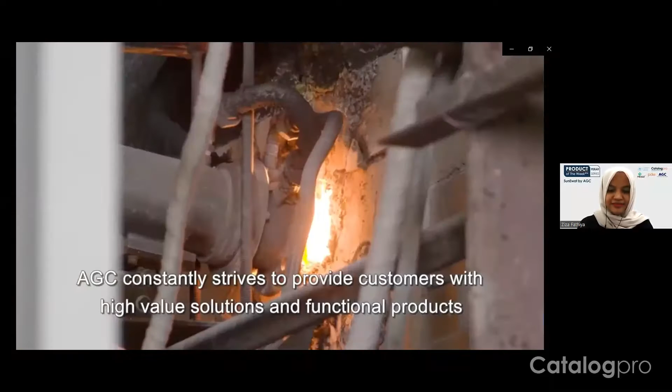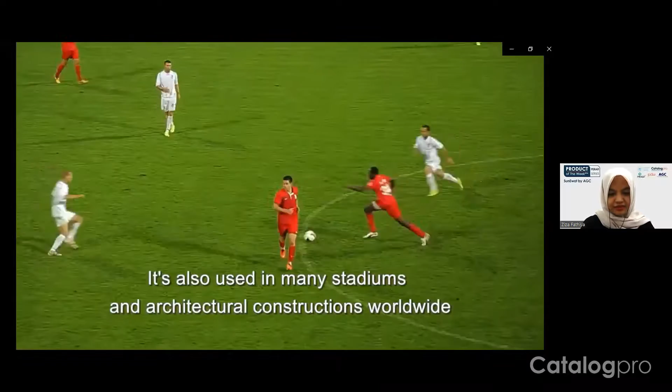AGC constantly strives to provide customers with high-value solutions and functional products. We offer a wide range of materials such as glass, chemicals, electronics, and ceramics, and have a strong presence in many countries around the world. AGC's aim is to provide valued solutions and high-quality materials to people around the world. Our fluoropolymer resins for coatings is used in many places around the world. Our fluorine film is used in Allianz Arena in Munich, Germany, and also in many stadiums and architectural constructions worldwide. AGC's display glass is used in smartphones around the world. Our glass plays an essential role in presenting clear images. At any point in time, AGC is playing a part in supporting society somewhere in the world with the provision of unique materials and solutions.

Mungkin teman-teman juga sudah melihat video AGC tadi, dan kita akan mendetailkan apa sih yang akan dibahas oleh AGC ini. Okay, let's start the talk show.

Marcus, can you introduce yourself and introduce AGC, and after that share what is SunEwat? Hello everyone, I'm Marcus, doing sales and marketing for AGC Smart Glass product. Today I'm going to share this product, smart glass solutions for sustainability buildings. First I will introduce what AGC is and how AGC is represented in Indonesia, and then we will talk more into the products itself.

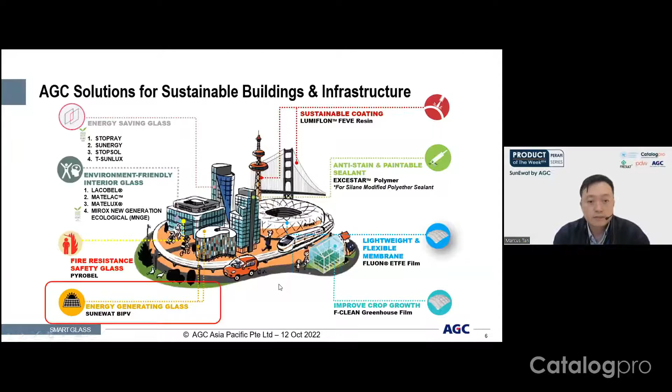So what happens is that in renewable energy in Southeast Asia, we hear about solar energy potential in Indonesia, with plans for expanding renewable energy across the country, and government policy intends to see 23% of energy supplied by modern renewables like solar by 2025. In Malaysia, we are also looking at moving with the times, whereby KL is looking at getting more renewable energy for new projects, like 30%.

In Thailand as well, renewable energy is moving towards these power generators. In Vietnam, they are also targeting net zero by 2050. And even in Singapore, we are looking at having natural gas, solar, and regional power grids, and switching towards more clean energy or better energy efficiency.

So what happened is that we are also looking at on-site renewable energy capability, which includes a good reduction of the need to encroach land or even waterways for the installation of conventional solar panels. It will also be good to generate on-site renewable energy for better environmental sustainability, and it will increase reliability, stability, and enhance energy efficiency as well.

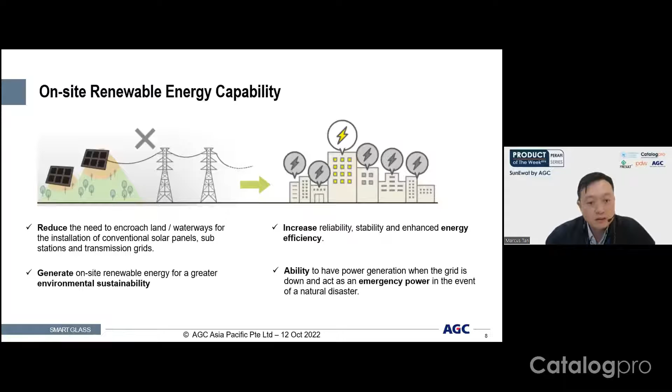Oh, sorry, I interrupt your presentation again. Okay, so this is quite interesting. So this is not just glass for the buildings, but the product can be used like solar panel or solar cells, right, Marcus?

Yes, yep, so it can be. It is actually a solar cell which is embedded into a piece of glass. Later in the presentation, you can see how the BIPV module actually works. Okay, please continue, because it's quite interesting for us.

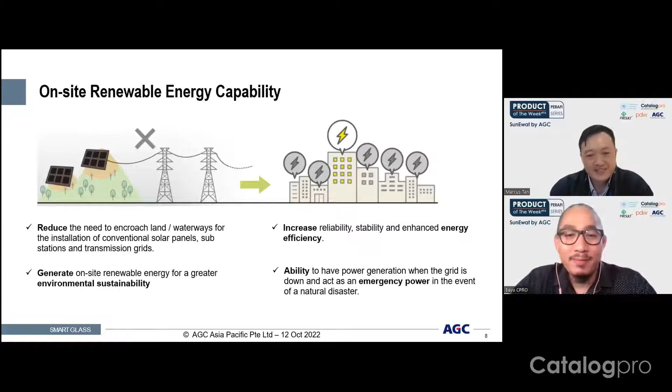Okay, so basically, like what you said, BIPV can be applied or used in on-site renewable applications, just like conventional solar panels. On this screen you can see that usually conventional solar panels are on the rooftop itself. But for BIPV, which is building integrated photovoltaic, you can actually use it on your facade, your skylight, canopies, your balustrade, and even your walkway as well. We have many project references later that we can showcase. So basically, it can perform as architectural glass and have a good variety of applications and solutions.

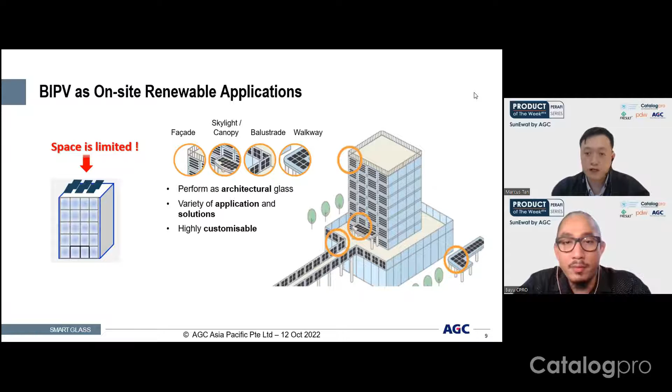And it is actually highly customizable. So in a sense that if you want any designs or patterns, we are able to provide you with our range of products. Later I will explain more in detail.

Sorry Marcus, can I ask about the previous slide? So in the normal solar panel we usually put it on the roof. In that case, you can use any glass surface to put the BIPV, right? Any surface, yes. So basically you can do it on the glass, and then you can do it on your facade, which is placing on the glass, or even your cladding as well. Oh, so all the facade can be the solar cell.

Yes, so even some of our products later, you can see that you will not be able to see the cells. Actually, it's our opaque kind of solutions. Okay, thank you, thank you. Well, it is quite an interesting product.

So in the conventional system, the solar panel and the glasses are separate systems, right, Marcus? Yep. And these products we can join to become one solution, become architectural products, and become an application for the solution for electricity, or we can catch the heat from the sun. Solar panels can do it today, right?

Yeah, so basically it is a glass, actually, but it is a glass with solar cells, and it can give you some shade, and it will also be able to provide energy generation using or harvesting the solar energy from the sun. So I would say not only 2-in-1, but kind of an all-in-one application.

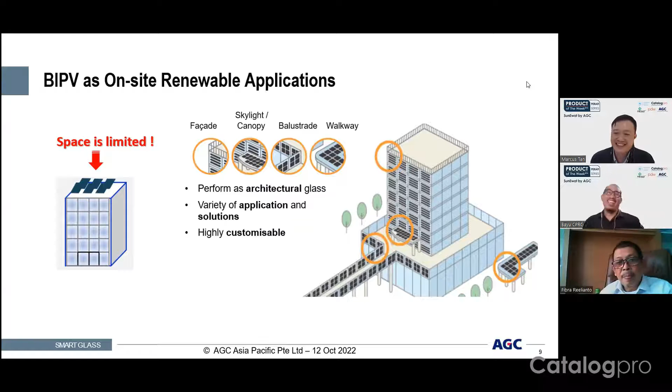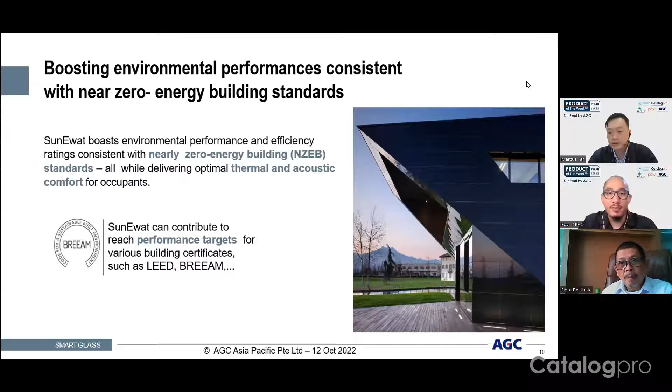Okay, so yep, they basically can boost these environmental properties, like what we have seen or shared just now on these near zero-energy kind of standards, in the sense of LEED and BREEAM as well.

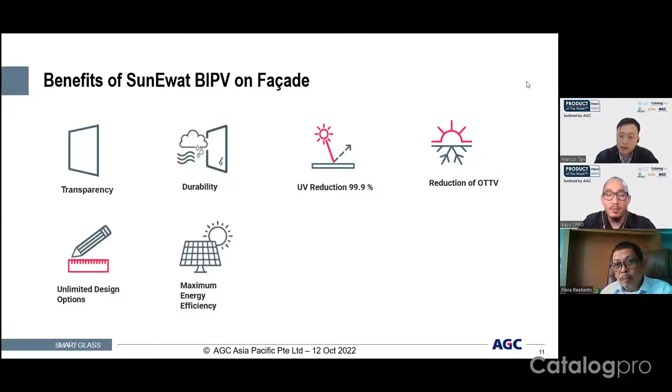Later I will share with you all our product range, and you will understand what we have for each kind of usage. And of course, it maximizes energy efficiency by letting the sun come in. With this IGU or even laminated glass, it can provide good thermal and acoustic insulation. And of course, the product is warranted by AGC, which gives you assurance and guarantee of good quality products.

For the durability, is it the same as normal glass or improved with this solar cell? It will depend on your modules or cells, but actually it is the same or even better for durability compared with normal glass.

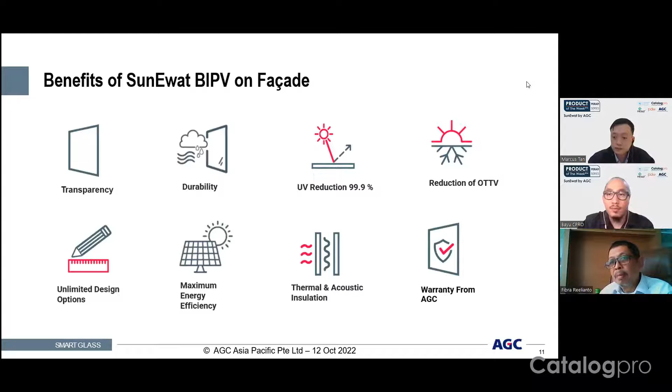So let's explain. If you look at this page, you can see that the glass composition is actually two pieces of glass laminated, interlayered using EVA, and in between is the solar cell. So this is actually a laminated glass.

If you are looking for better thermal comfort or better acoustic insulation, you can add an air gap and another piece of glass to make it an IGU unit. Basically these BIPV modules have two kinds of junction box: back type, where you see the junction box on the bottom of the panels and modules, and edge type, which can be covered up with aluminum extrusions on the side.

So in terms of system... I'm just curious about the thickness of the glass, Marcus. Because we know in the preferred system for the solar panel or solar cells, the thickness is quite big, right? And when we combine with the glasses, how does it become the system?

Okay, so for us, basically we will recommend 6+6 glass thickness. So if you see laminated, it will be 6, and below will be 6, giving you possibly 12 plus the EVA. This enables good durability and good resistance to acoustic or thermal comfort issues. This is the minimum, and we are able to do lots of customization. So if you want something thicker, or want low-E coatings on your glass, we are able to do that as well. There's no fixed or standard, but we will recommend at least a minimum of 6.

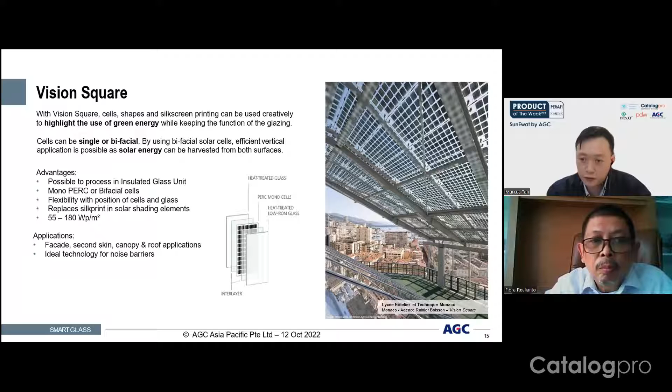So the first is the Vision Square. This is actually the more common, customized product that we see mostly. Some countries are already using it, and it can be done with a single or even bifacial kind of look, and you can also process it into an IGU. We have flexibility in terms of the positions of the solar cells on the glass, and also replacement of the silk print in solar shading elements. A good application, as you can see on your right, is used on your skylight or even your canopy on top, providing shade while also letting light penetrate through, with energy-generating solutions on top.

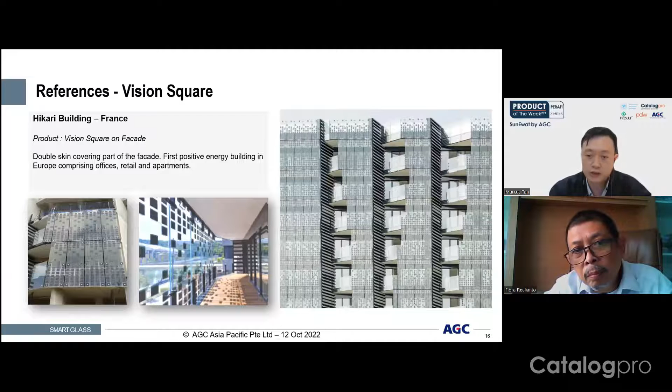Another project is used on the façade area. You can see this is actually the first positive energy building in Europe, in France. From the center of the photos, the center side is actually visible to the outside. AGC is able to customize the panels and cells to have solar cells on the top and bottom, while the middle still allows you to view the outside scenery you're looking at.

Sorry, I interrupt you. I'm just wondering about the square solar panels - is it designed by the architect or by AGC?

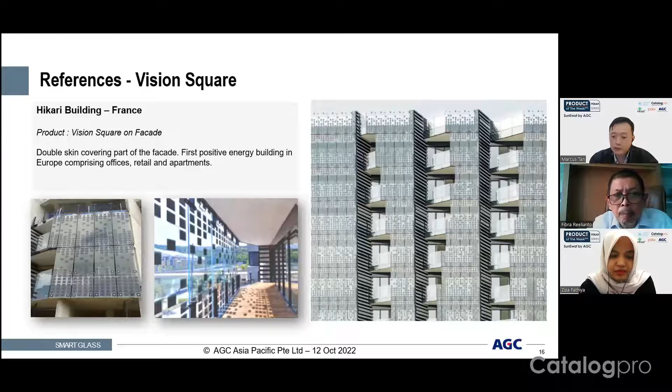No, the square solar is actually across the board, standard - or we say it's a standard from suppliers. We're looking at 156mm by 156mm kind of solar cells.

Okay, thank you. Please continue.

Oh, this is very interesting, Marcus, to discuss, because actually the solar panels in the glass can also be used like a blind too, right?

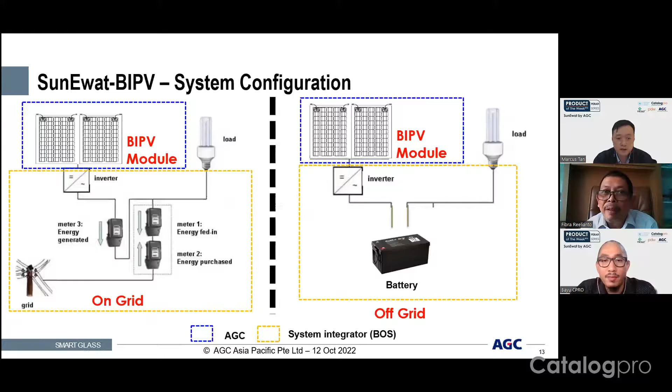So it's a connection or connector from the energy point of view, with cables connecting all the bus bars, carrying all the energy into this cable, which carries DC voltage to the building itself. But it can also be designed to be concealed, right? Yes, if you want concealment, edge type of junction box can be concealed, because architects don't want cables showing outside.

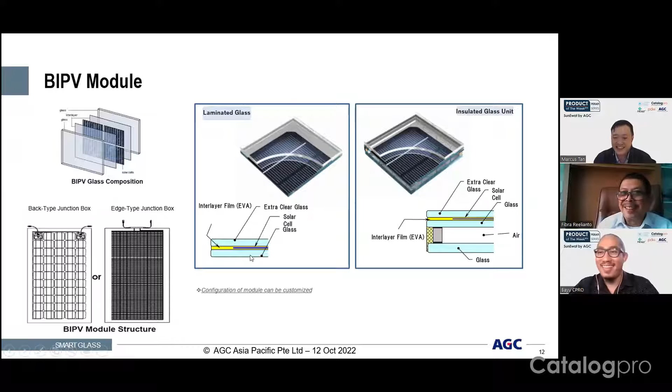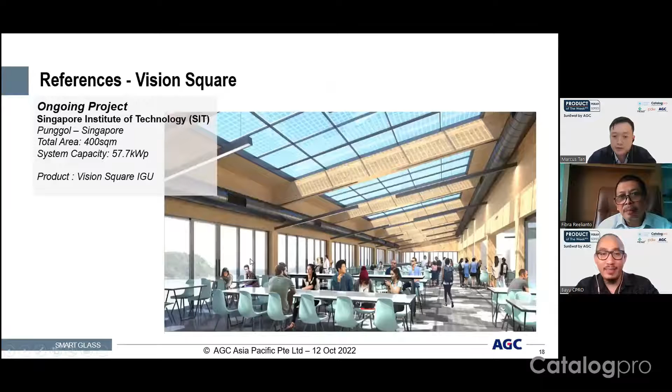So if you see this, it's actually using edge type of junction box, and all the connections of the connectors are actually inside. For this one, also edge type, and this one is actually using a back type, so you can see all these junctions coming out.

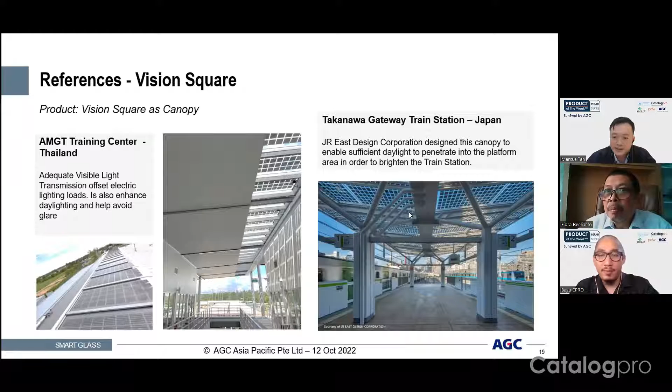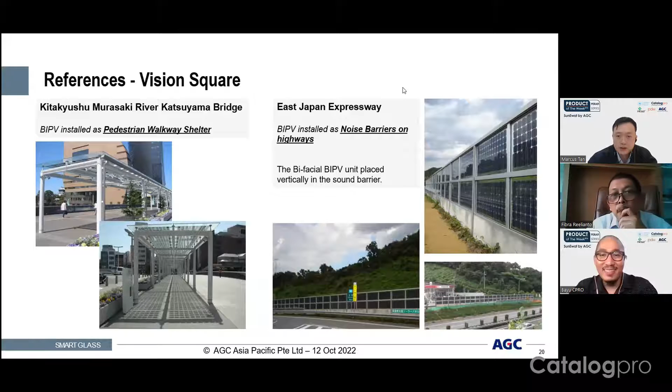This one, we find some angle whereby you will not be able to see the junction box. This is also a project reference. You can use it on your walkway or walkway shelter in Japan, and also as a good kind of noise barrier in this expressway in Japan. So these are some of the references that we use for these Vision Square kind of products.

Then Vision Stripe is the product whereby, as you mentioned, it looks like some kind of blind system. Actually it's a cell of this Vision Square, laser cut into these stripes. So it gives you the idea of blinds, called Sudare in Japan, which means a blind system. The good part is that you can use it on your window or vision areas, like you can see on the Kashima plant.

Of course, some of the downside is that the energy generated of this product will be lesser. This is good in the sense that, for this project particularly, they installed all the conventional solar panels on the rooftop, but they still wanted more energy to harvest and maximize the reuse. So the architect decided to design these window blind kind of systems on the vision area.

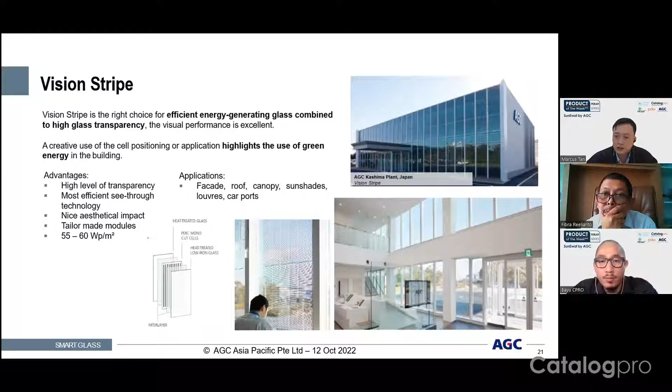So you can see that from a distance, or even close up, it actually looks like a blind - you will not be able to see these kind of stripes from distance. This is particularly good if you want to maximize the area for getting solar panels, without sacrificing a good aesthetic look of the buildings.

For example, in this Kirin beer project in Japan as well, you can see that on top they are already using conventional solar, but they wanted to harvest more energy, more light, and to achieve zero energy.

Is there any questions? The transparency I see here - you have the solar cell, but it looks very transparent. Yeah, so actually these cells are laser cut into smaller pieces and divided into stripes, little stripes.

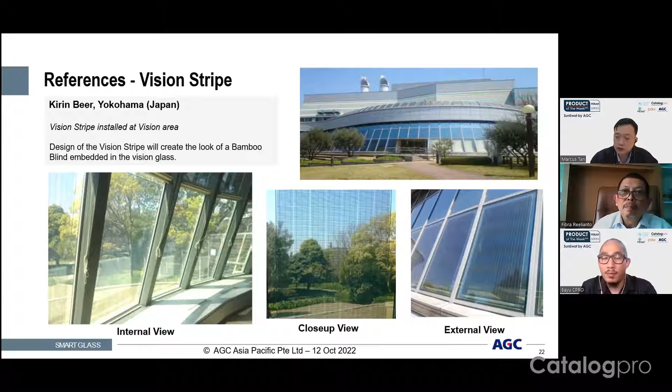So it creates a good look like these bamboo blinds, which is being embedded into this vision glass. One project in Penang, Malaysia - this is installed in the vision area, or pantry area, whereby you can still oversee the good view, and also harvest some energy to the building to offset some electricity power, and provide a kind of shade for the building. If you look at it from outside, it actually blends in very well with the building itself.

Okay, so these are our two. Yeah Marcus, I'm just curious about the maintenance. Since we know glass is one of the fragile materials, right?

So the products have maintenance - it's quite hard, or we just treat it like conventional glass, Marcus? So there's no special maintenance needed, it's just like normal kind of glass cleaning. Every year, or twice a year, you will do some kind of cleaning to maintain the facade area of your glass, just like a normal piece of glass of the building.

You can combine it like thermal glass that has the surface and laminate it together with this one. You can do any kind of low-E coatings on the surface.

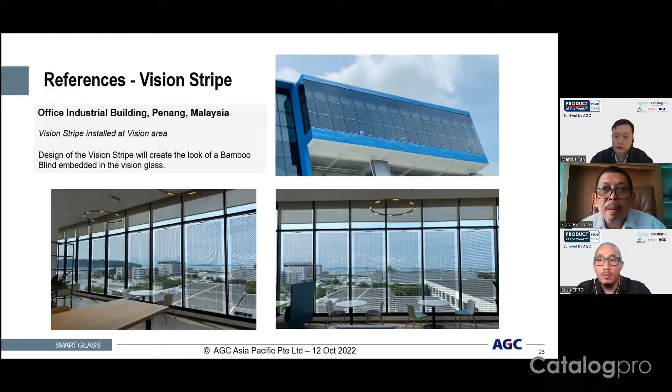For example, the next product I would like to show is Stopray Active. So actually this is using the same coating or matching coating with our Stopray range of finishes, and it gives you a good aesthetic look on the building itself with no kind of static.

You can see that on the right is a rendering image of the building, whereby the spandrel area is actually using this Stopray Active. This will be easier to showcase - the vision area is using our Stopray Ace 40T, and then the spandrel is using this Stopray Active. You can see that from the front.

In the previous slide, you mentioned heat treated glass - do you use it for spandrel area, or for vision also do you advise heat strengthened glass? Vision area meaning this area for this product, this one for the spandrel, like the Stopray. Stopray Vision is our vision kind of coating by AGC, commonly used on the vision area.

And for this, our SunEwat Stopray Active is used on the spandrel area. So these two are actually using the same kind of Stopray Vision coating, like 40T, 50T, giving you the same kind of colors or matching coatings, so they look seamlessly the same. It's using a heat-treated low iron glass, and also a heat-treated black enamel. It can be heat-treated, and also it can be tempered glass.

Can we use normal anneal glass? Is it recommended? No, not recommended. So for the coating on the glass, does it not hold the function of the solar panels? We will actually recommend the front piece of panels to be low iron, so it can have a better absorption for generating more solar energy.

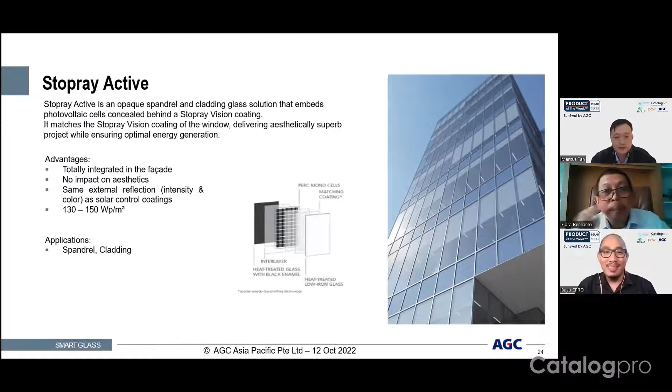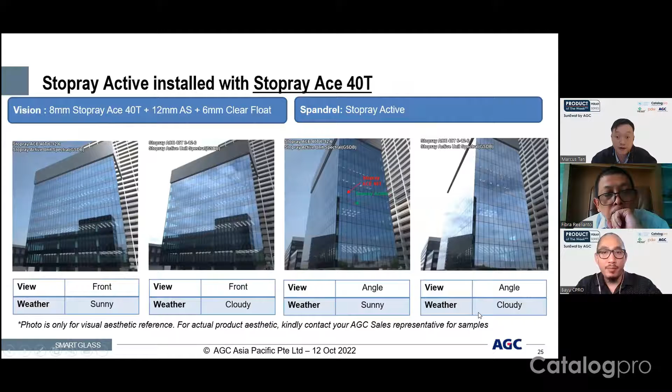Like I explained, you can compare with this Ace 40T, so you can look at it very seamlessly, or another rendering image that we compare with Vision T40, 50T. You can see that it gives a little bit brighter coating, but it can give you a nice seamless look for the external facade.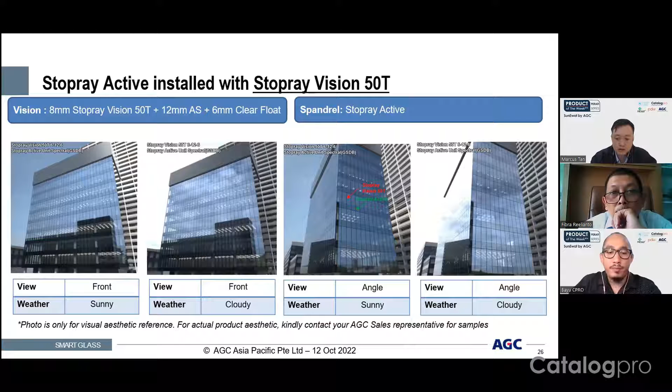If you feel that opaque solutions and the color of Stopray is not so interesting for you, we have another product called Artlite Active. Artlite Active gives you the ability to create art - we can have unlimited designs or fully customized designs, logos, or colors. For example, we used this Artlite Active to design our AGC logo, as you can see on the screen. And of course, it can also be done in neutral colors or even RAL colors.

Anything or everything - one project we have in Belgium, you can see from this picture, people will think that the light bulb kind of design is just decoration for this building. But however, it's also using this Artlite Active, and it can actually generate electricity from the sun or solar energy, harvest it, and produce electricity for usage on this car park itself.

So it does offset some of the energy used for the building, or in this instance, the car park. You can see from these projects, like the Shell Technology Center in the Netherlands, the design or logos - we'd think it's just a design, but it's actually energy generating products whereby the architects incorporate it into the building facade itself. So you won't feel that it's conventional like rectangular shapes only - for Artlite Active, you can have unlimited designs, anything you want to customize, anything the architects or owners want for the building.

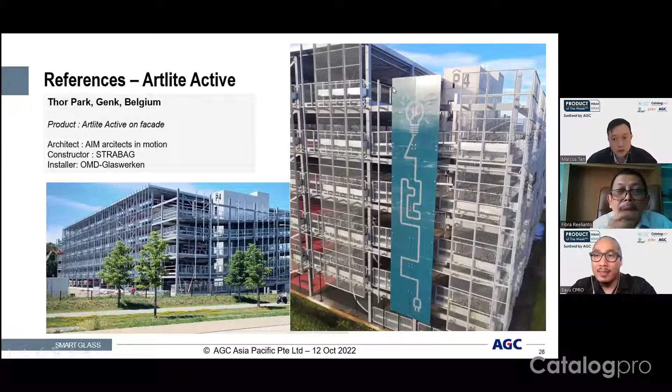Based on the designs from the architect, we can do digital printing based on our vision, and then the patterns will come up. We have 3 different types of energy: optimal, medium, or basic. If you want your designs to be higher resolution, the basic will be more preferred. However, if you look closely, the energy harvest will be slightly less compared with the better or optimal one, which gives lesser resolution because of the more black area needed to actually harvest the sun. So these are some of the products or range of ideas we can provide to our customers.

So lighter color will collect energy lower. Oh I see, so better to put the black - that's why the basic one is the black one, right? Yeah. Some will feel the normal black one isn't, because with the black one you will still see the solar cells, but for this type you will not see the cells actually.

So the deeper colors, it's better for solar panels, right? The darker the color, the absorption will be higher. Oh okay, so these products, your solar panels can become not just blind, but become like a design for the facades, right? Yeah, correct. Wow.

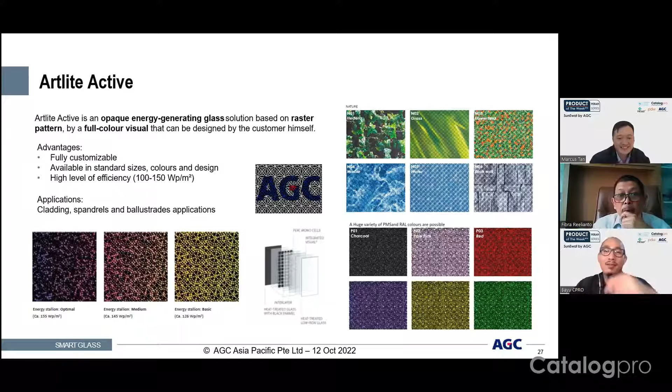Okay, let us start the slide. So like what you mentioned just now, you thought a black color, this is probably what you're looking at. So this is one of our products called Lacobel T Active. It actually has this matte color and also this glossy finish, based on our technology or our proven leading technology.

It's actually applied as a paint, this technology paint on the front or on the second side, giving you a nice uniform appearance, nice quality glossy finish, or even matte finish. The advantage is that unlike conventional panels where you will still see the cells, for this product you will not be able to see the cells on the front of it.

For example, in this project in Norway, it actually uses this product incorporated into the building. You would think that all these black areas are just cladding, but you will not see the cells itself, and it gives a nice uniform matte black color for the building. Probably the reason why they choose black - as you've also shared - is that black would be a better solution for harvesting more of the solar energy.

Then you can see there's another building and other project at the French Ministry of Defense, France. This is actually using Lacobel T Active on the rooftop as well, and it's also using this black color.

So you mean the black one is the glass, not a solid panel? Is this product whereby it is glass on the front, or even two pieces of glass, and in between is actually the solar cells, and then the black is actually the uniform painting? The paint inside. Yes.

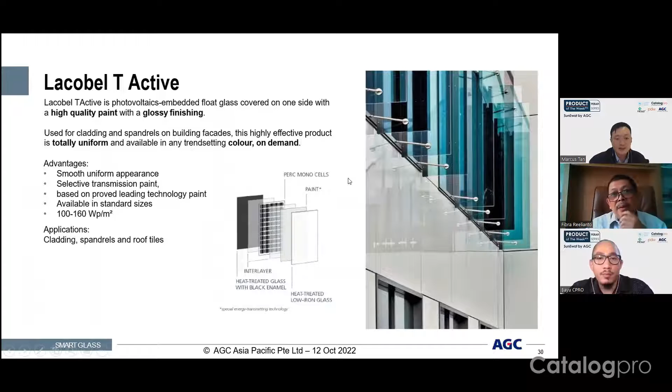Oh yeah, so a lot of people thought it was just some kind of cladding or design. So yeah, that's why all these products give you a good look, and architects will actually like it because it can give them a seamless result - they do not need to incorporate all these solar cells, which some of them feel doesn't match into the building or doesn't match the designs that they want.

So these are some of our quick solutions, a range of products whereby they can play around with colors, having the uniform designs, or even if they want to use a standard, there's this Stopray Active kind of product whereby they can incorporate it into the building and it doesn't seem so out of the designs they want. Moreover, it's not just a spandrel area or cladding, but also an energy generating facade which can harvest free energy like solar and use it to offset your electricity.

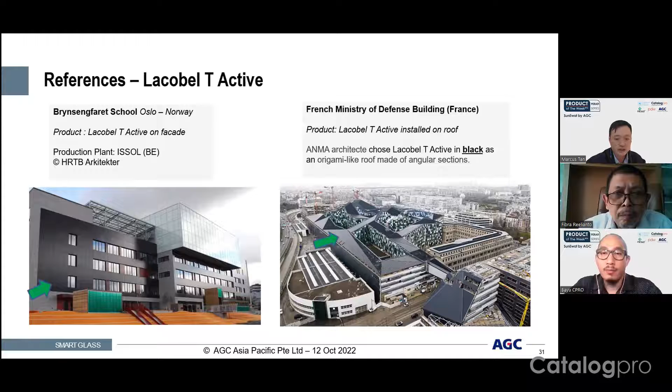So, last or ongoing project in Malaysia - this is one project whereby we are doing right now at University of KL. It's actually the first sustainable energy living lab in KL, whereby they are looking at Artlite Active to do the design, and then also using Vision Square on the rooftop and also on some areas of the facade. So this is actually the first zero energy building in Malaysia, whereby they are using these products, 553 modules altogether.

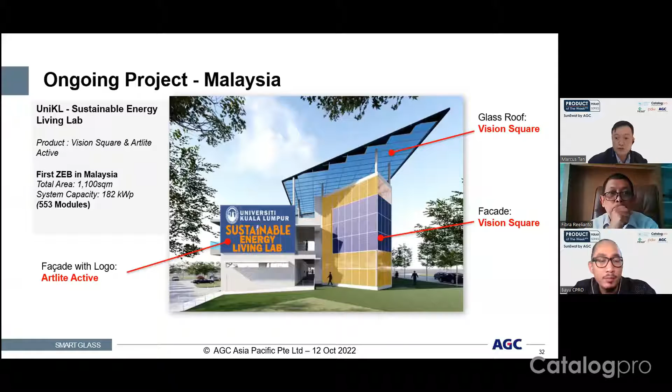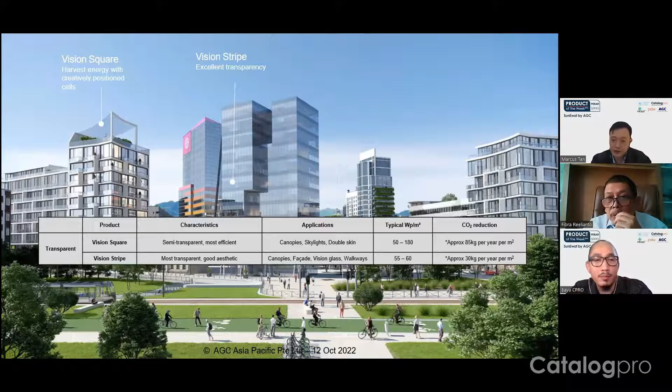So in summary, these are some of the product range that we have and look into. The transparent side is looking at Vision Square and Vision Stripe. Vision Square is the common square kind of semi-transparent, but it's the most effective. And if you want more transparency and a good aesthetic view, you can use Vision Stripe, which is like the bamboo line.

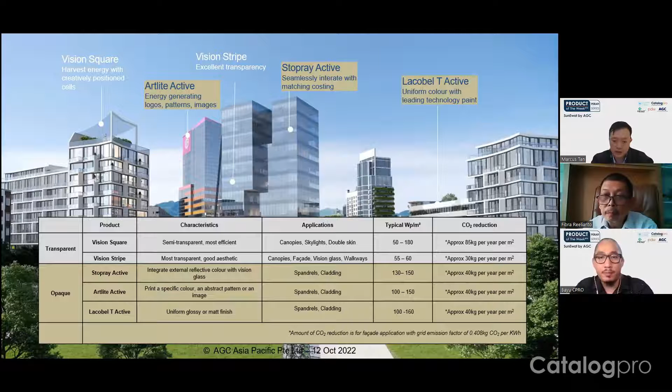And if we are looking at opaque kind of solutions, we have Stopray Active, which has the same kind of reflective color as the vision glass. Artlite Active gives you unlimited kinds of designs, patterns, logos, or images that you are looking into. And then Lacobel T Active is the uniform color whereby you can seamlessly blend into your building itself, like your claddings or even your ceiling. So total 5 products for different uses and ideas.

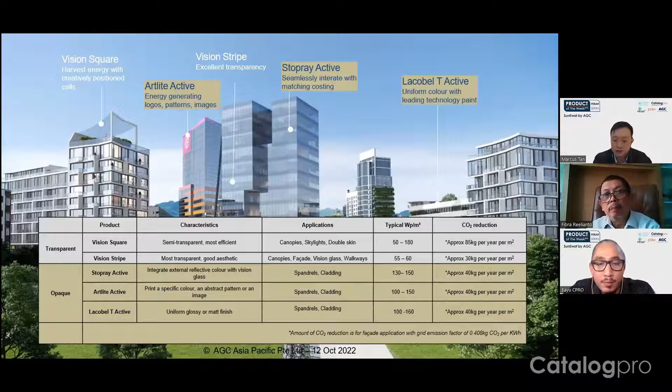So in terms of service that we are able to provide, our team based in Singapore is actually looking at the region, and of course Indonesia, I think, is one of the most populated and very big countries. So we are also looking at getting more inquiries from your side, as one of our main countries as well.

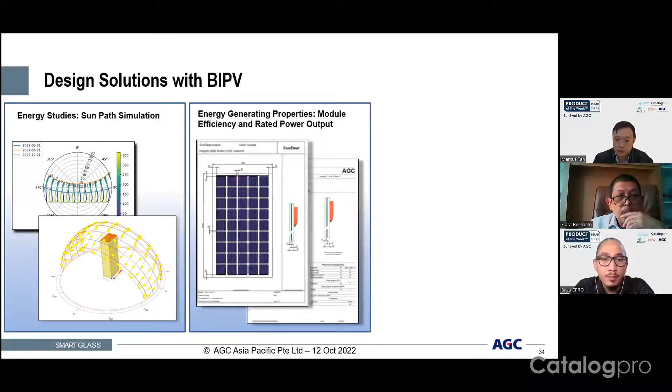So you can see that we are able to provide this kind of sun path simulations. And with that, we are also able to generate properties like module efficiency or rated power output to actually showcase and explain in more detail how it can improve efficiency. And then, of course, as a glass manufacturer, we are able to provide glass performance figures like your SC value, U value, and also light property to put into the specifications as well.

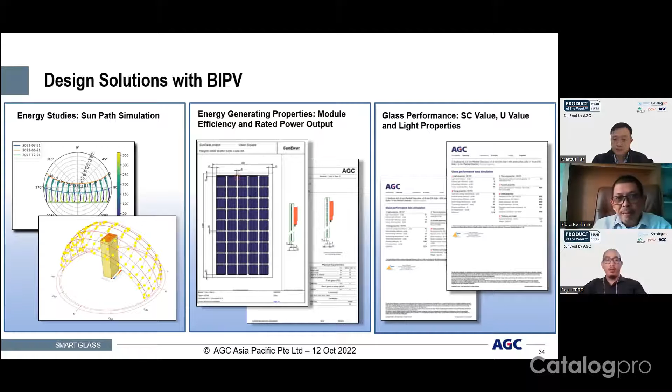In terms of solutions or support, during the design stage we can do simulations and good calculations or studies. We can create prototypes and glass compositions for our customers, and then do target evaluations on how to put in all these solar cells or BIPV to meet net zero energy standards or regulations.

We are also able to provide technical services like installation, supervision, commissioning, and monitoring during the design or installation phase. What separates us from competitors is that we are based in Singapore, which is close to neighbors like Indonesia, so we provide local services through Asahi Mas in Indonesia, where you can send your query and they connect with us. AGC, being a glass expertise, gives us good freedom of design for different types of glass for customized solutions, and we have good technical assistance with designers and project management sitting in our Singapore office.